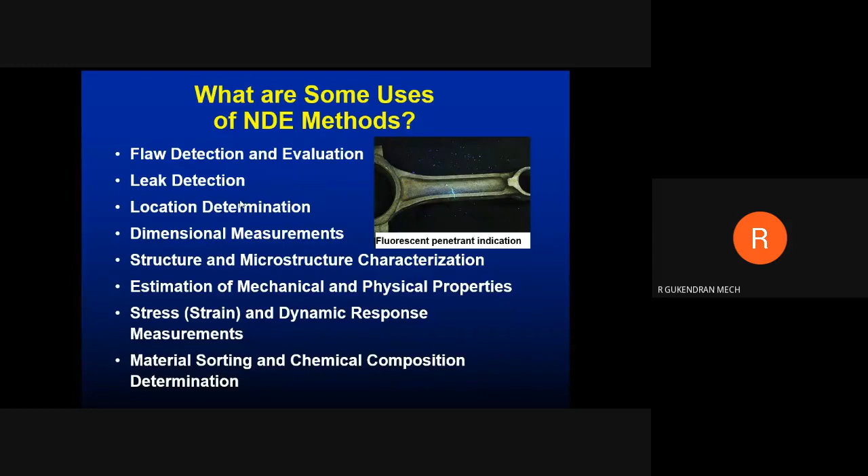Look at this - visual inspection and dye penetrant methods are used only for surface flaws. So coming to this, flaw detection and evaluation, then leak detection - these things may be used.

Leak testing is also available. Magnetic particle testing is not to be used for material characterization - this may be used only for flaw detection.

Eddy current testing and ultrasonic testing may be used for characterization purposes, and also radiography. These things may be used for characterization purposes, and also acoustic emission.

Based on the waves received, you can identify the hardness. Actually I did this with ultrasonic testing to identify the hardness of a steel.

I did experiments with eddy current testing as well as ultrasonic testing. I have used both methods to characterize the material. I have used ultrasonic testing for measurements as well as characterization.

Heat treated components are tested with this ultrasonic as well as eddy current testing, to see how the hardness is varying and how the waves change when the hardness varies. Everything I have studied already - this is for your information.

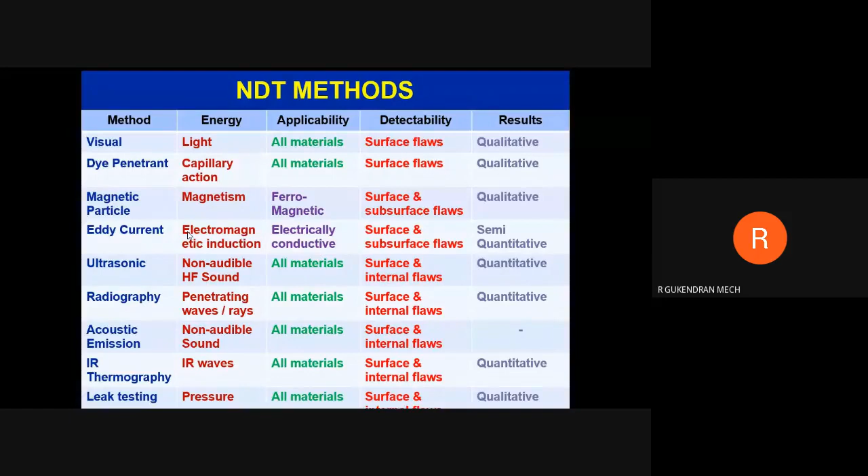And this thermography may also be used for flaw detection.

And when are the NDE methods used - there are applications at almost any stage in the production or life of a component, life cycle of a component. The life cycle is from the design stage to the end of its product life - that is called the product life cycle.

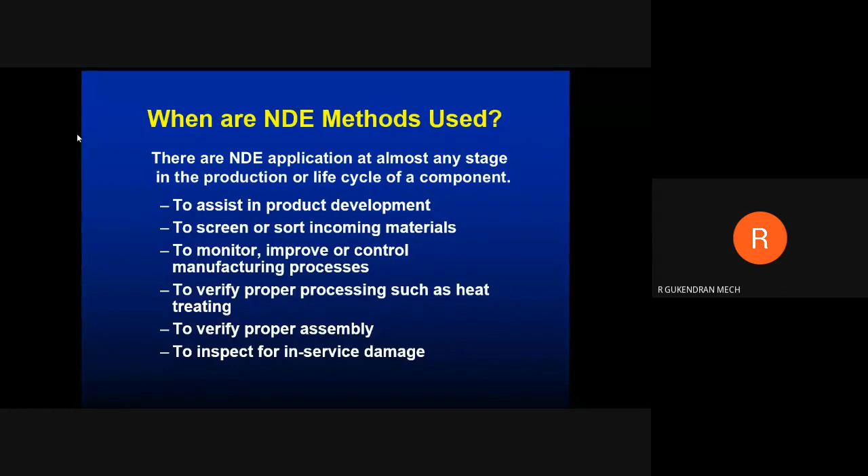This is used to assist in product development, to screen or sort incoming materials, to monitor, improve or control manufacturing processes, to verify proper processing such as heat treating, and to verify proper assembly, to inspect for in-service damage. For these things, we may use these NDT methods.

And the six most common NDT methods: visual inspection, liquid penetrant testing, magnetic particle testing, ultrasonic testing, eddy current testing, and X-ray or radiographic testing. These are the main topics in our syllabus.

Visual and liquid penetrant testing is in the first unit, then this is in the second unit, ultrasonic in the third unit, X-ray is in the fourth unit, eddy current test in the fifth unit, and so on. These are the commonly used NDT methods.

So next we move on to the visual inspection technique. We have discussed what is visual - by viewing with our naked eye or with the aid of optical aids with lighting. Inspecting using these optical aids and with lighting is also called the visual inspection method.

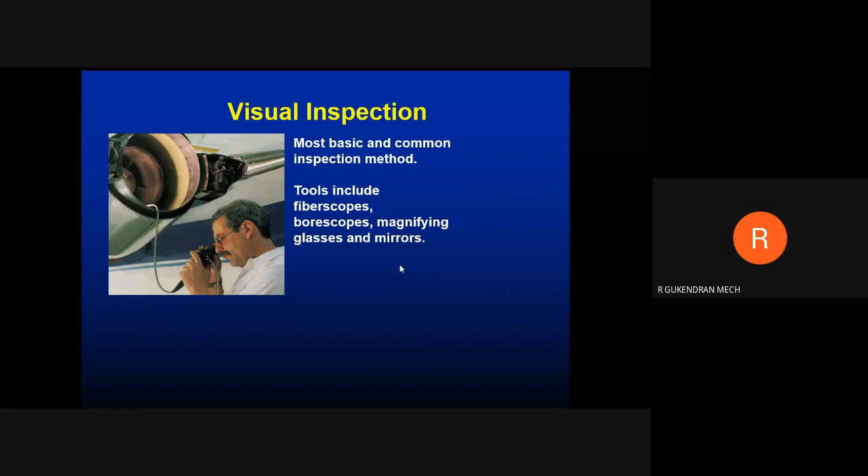Magnifying glasses - that is a microscope or a simple hand glass, handheld glasses, everything. And mirrors - maybe the dentist, they are using the mirror to view the inside parts, right?

Portable video inspection unit with zoom allows inspection of large tanks and vessels, railroad tank cars, and sewer lines. So this will be moved around the railway track or large tanks, right?

Then robotic crawlers permit observation in hazardous or tight areas such as air ducts, reactors, pipelines, etc. In these areas we are unable to access the inside of the pipes, so we can use this kind of robotic crawlers. This will travel inside the pipes so that it will capture a clear image so that we can identify whether any defect is present inside the pipeline or not.

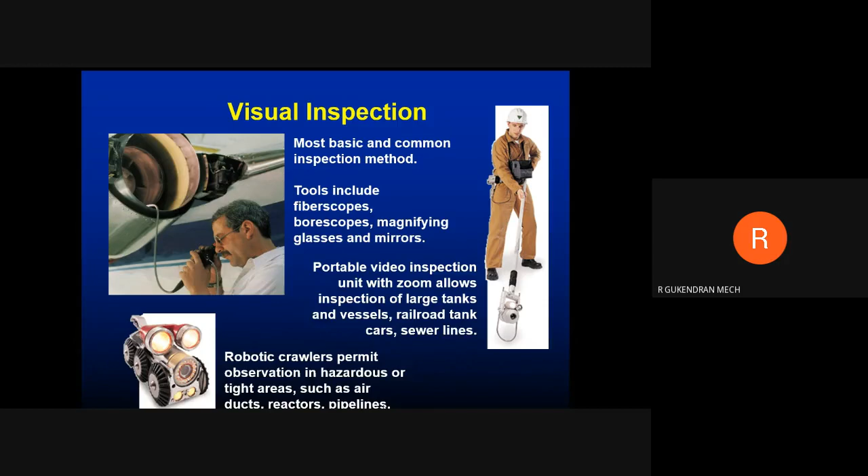Then optical aids used for visual inspection. First one is a microscope, then borescope, endoscope, flexible fiber optic borescope, then telescope and holography. So these are some of the optical aids used for visual inspection.

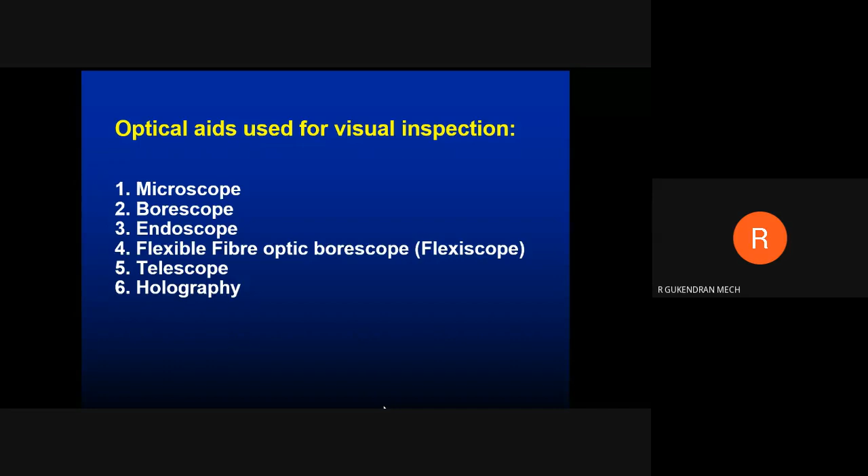Microscope - it is an instrument used to see objects that are too small for the naked eye. The science of investigating small objects using such an instrument is called microscopy. I think everyone has used a microscope in laboratory classes, so I don't think I need to explain much about these things.

And magnification of f - f is the focal length of the lens, and 25 is a constant, the minimum distance at which an object can be seen by the unaided eye.

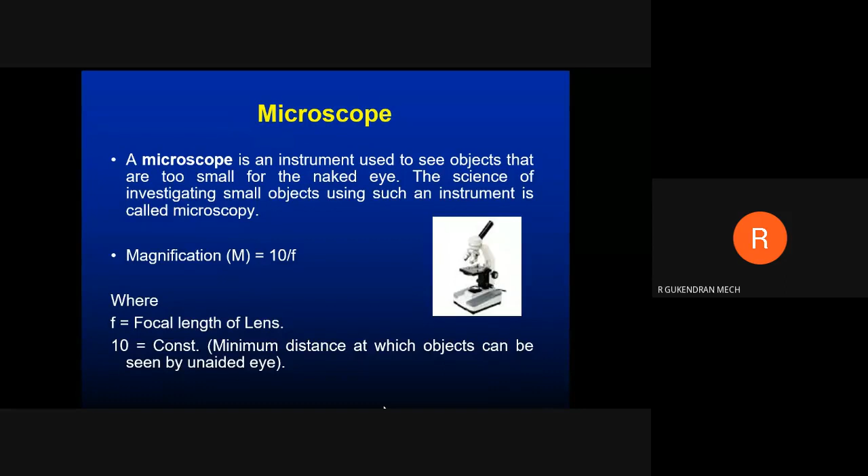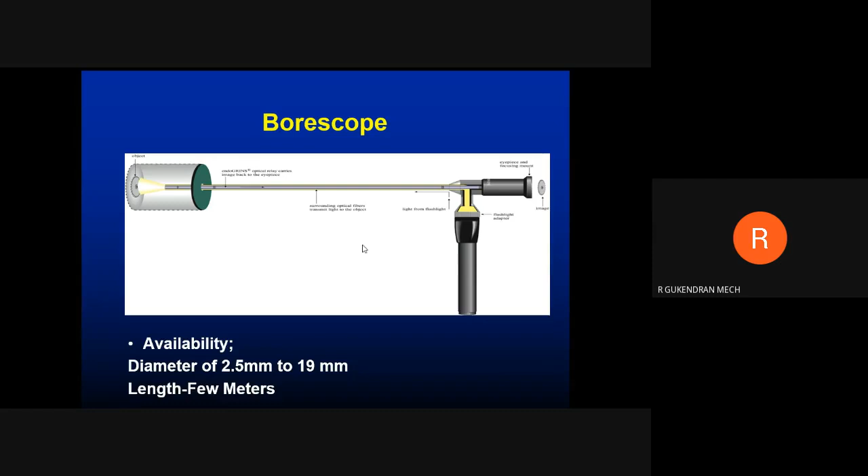This will travel inside small pipes, ducts, whatever may be. Then endoscope - I think some of you may have experience with this, especially no focusing features, diameter less than 1.7 millimeter and length is 100 to 1500 millimeter.

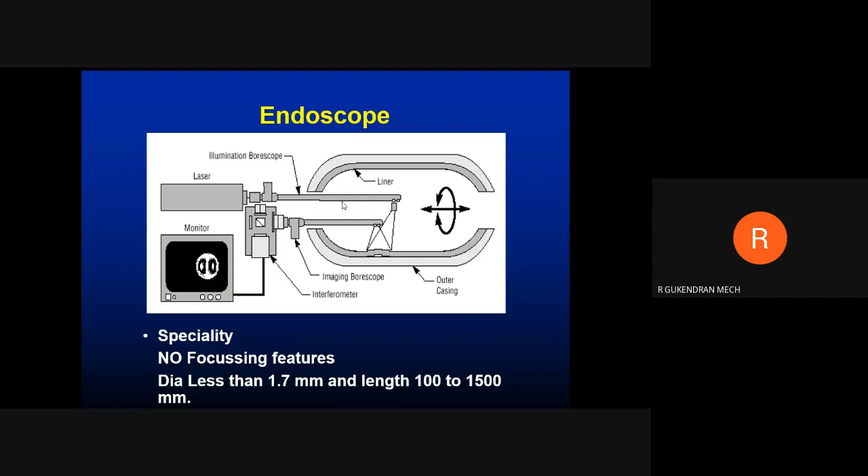The next one is flexible fiber optic borescope, also called flexiscope. This is called flexible so that we can insert this tube in any place, like a wavy place or a small turning duct, whatever may be. One stainless steel sheathing protects the image relay bundle, and working length is 60 to 365 centimeter, diameter of 3 to 12.5 millimeter.

So next one is a telescope. This eye consists of lenses, then CCTV used for this purpose. By using this telescope, we can view the distant object nearby.

The next one is holography - obtaining an accurate three-dimensional image of a given object. First stage is 2D interference pattern and second stage is 3D image by laser.

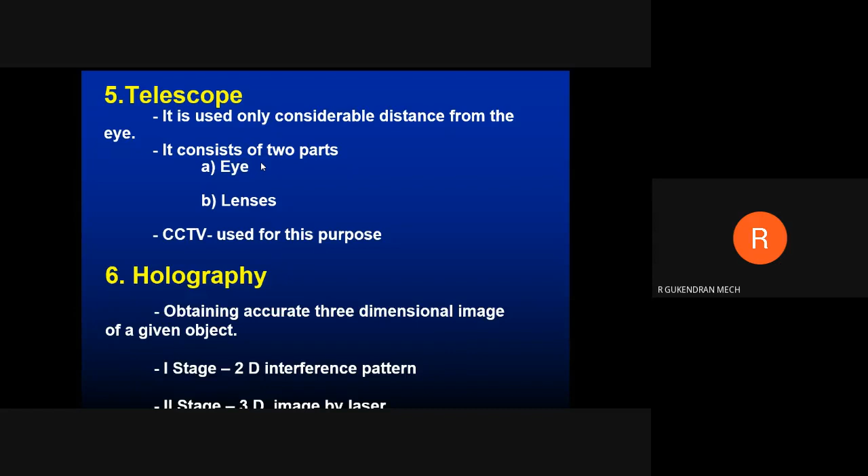Applications: inspection of plant systems, components for any leakage, abnormal operation, etc. Then misalignment of parts in equipment - sometimes the alignment is not proper, that can be identified using visual inspection. Then corrosion, erosion, cracks, fracture may be identified using visual inspection.

Then defects in new or repaired weldments such as gross surface cracks, lack of penetration, tear cracks, excess reinforcements, porosity, mismatch, etc. Then minute discontinuities with the help of optical aids in pumps, compressors, turbo generator parts, instruments, etc. So these are some of the applications of visual inspection methods.

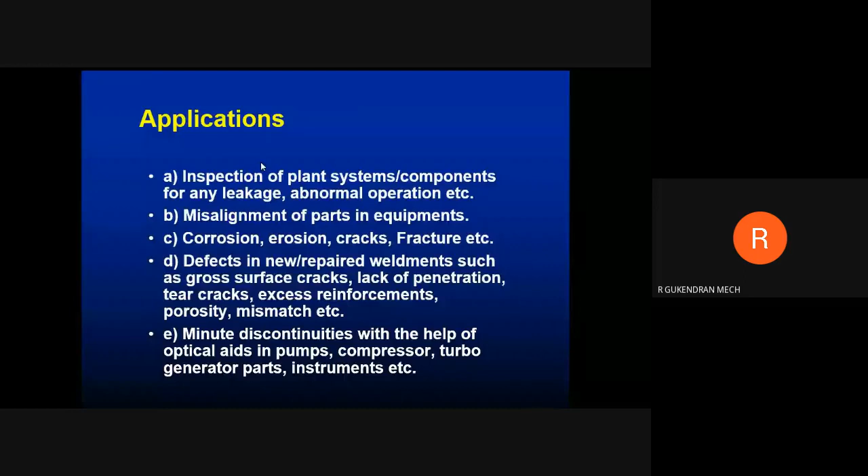That is the use of the visual inspection method. Right. So in this also, very minute cracks present in the surface may not be visible to the naked eye. For that purpose, we may use magnifying glasses. Or if it is not identified, move for another step. That is another method.

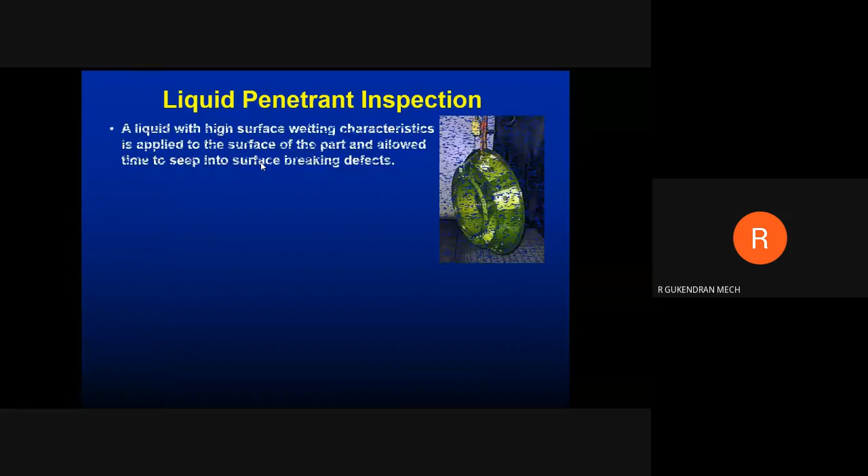So next one is liquid penetrant testing. So before moving to liquid penetrant testing, I'll show you some of the defects present during the manufacturing process. Okay, just a minute. Yeah, just a minute. It is taking too long to open.

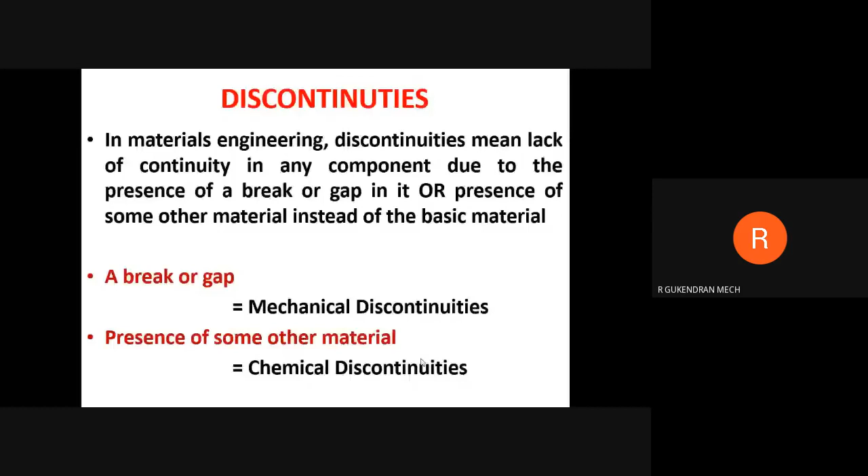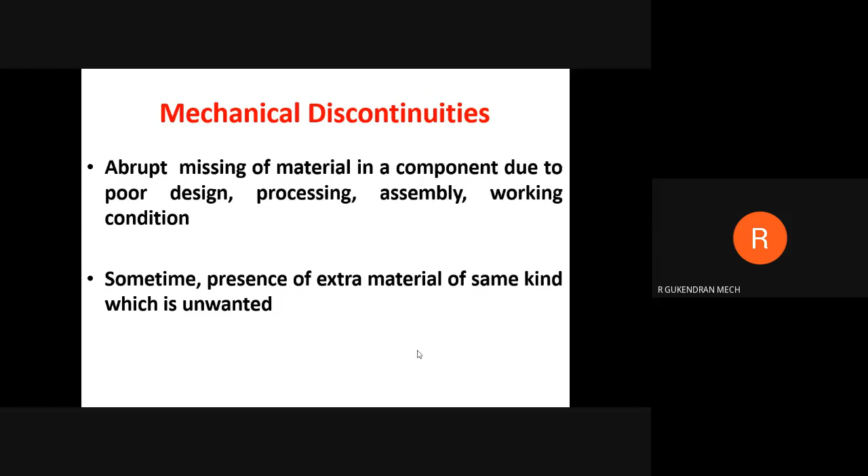Then mechanical discontinuity is abrupt missing of material in a component due to poor design, processing, assembly, and working conditions. So this may be the main reason for mechanical discontinuity, and sometimes presence of extra material of the same kind which is unwanted. That is also called a mechanical discontinuity.

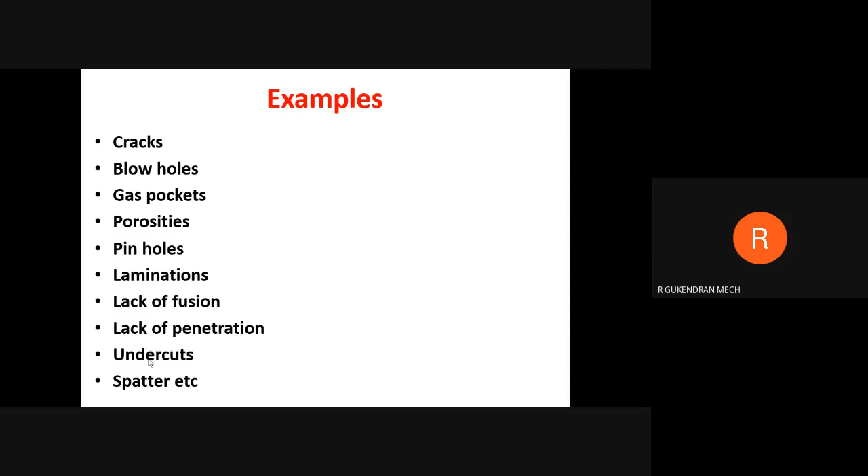Then laminations. This may be due to forging. Then lack of fusion, lack of penetration, due to... then undercuts. This may be available during the welding as well as casting process. Then spatter and so on.

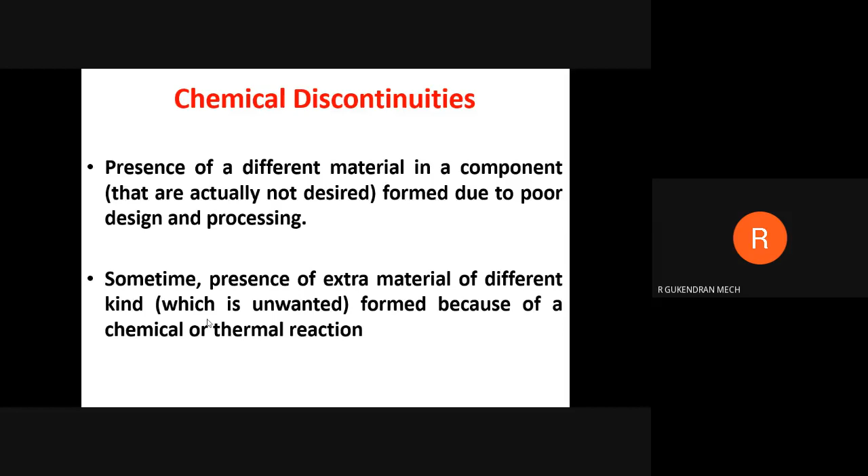Then the chemical discontinuity is the presence of different material in a component that is actually not desired. That is commonly formed due to... sometimes the presence of... formed because of a chemical or thermal reaction. So these are coring, tungsten inclusions, corrosion products, etc.

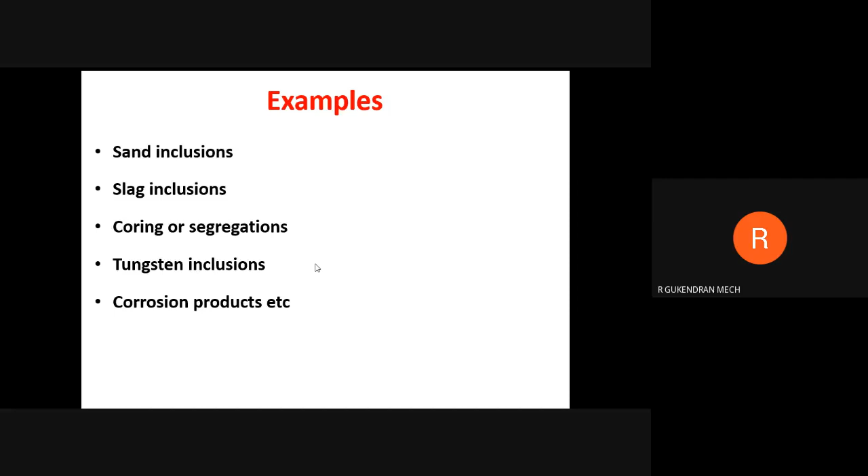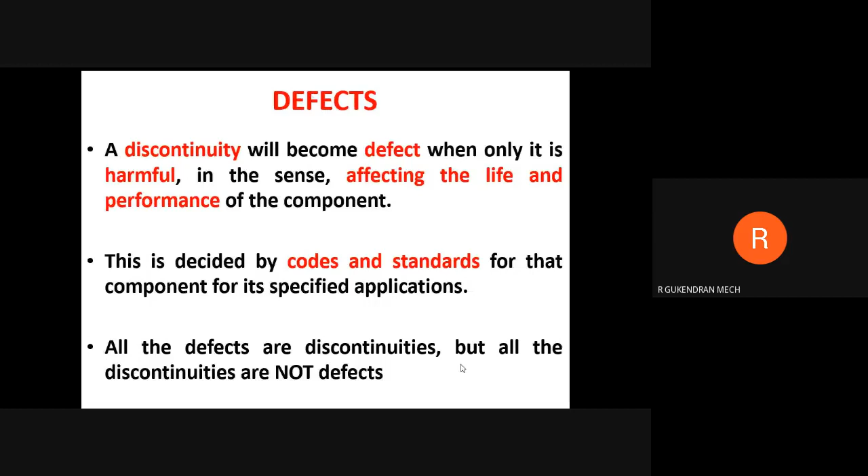And next one is a defect. A discontinuity will become a defect only when it is harmful, in the sense affecting the life and performance of the component, and this is decided by codes and standards for its specified applications. All the defects are discontinuities, but all the discontinuities are not defects. Keep in mind, all the defects are discontinuities, but all the discontinuities are not defects. This may be asked in your competitive examination also.

Then whether it is a discontinuity or a defect, how to identify? So criticality of the component, then the size of the discontinuity, type and shape of the discontinuity, population and distribution of the discontinuities, location of the discontinuity, orientation of the discontinuities. Based on these things, we have to identify whether it is a discontinuity or a defect.

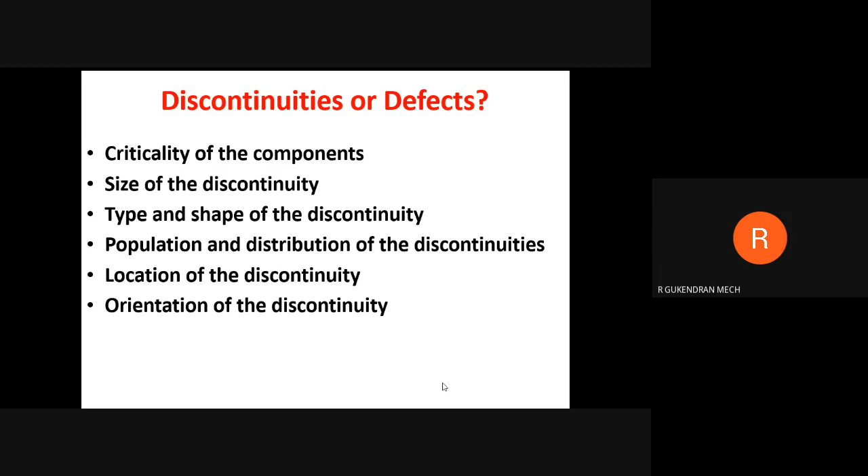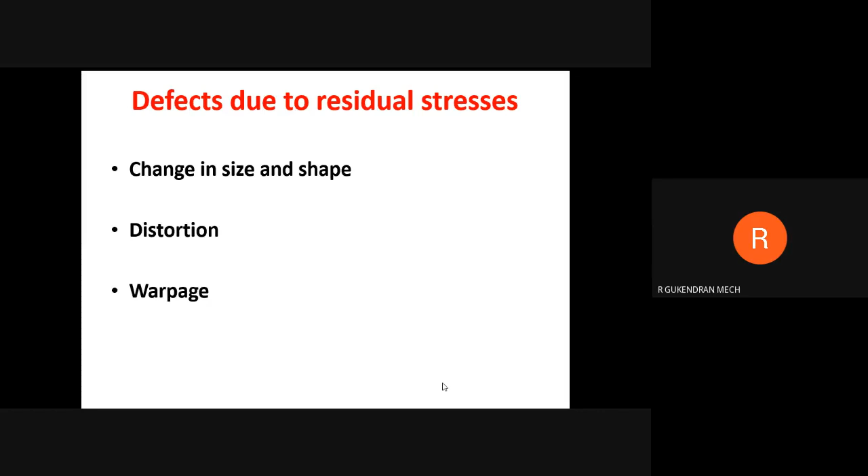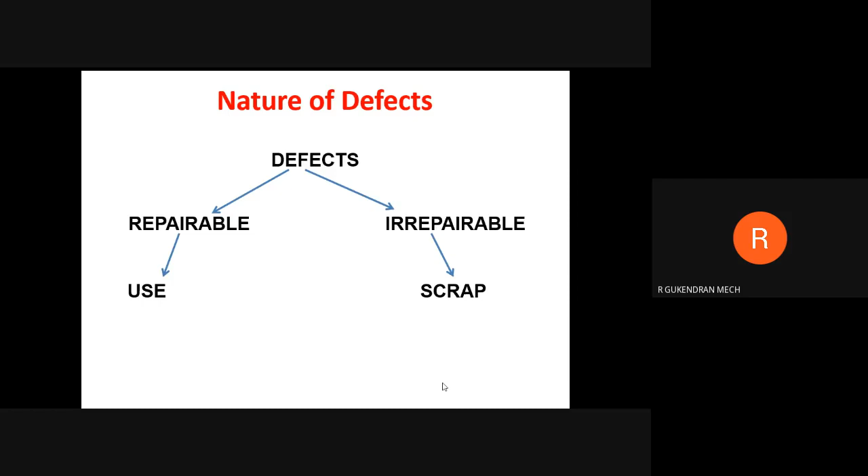Change in size and shape. So maybe a fold or distortion or warpage. These are due to residual stresses. During the machining or forging operation, these things may happen. Right. Then nature of defect. The defects can be classified as repairable and irreparable. Repairable means after repair we can use it. Irreparable, it becomes a scrap.

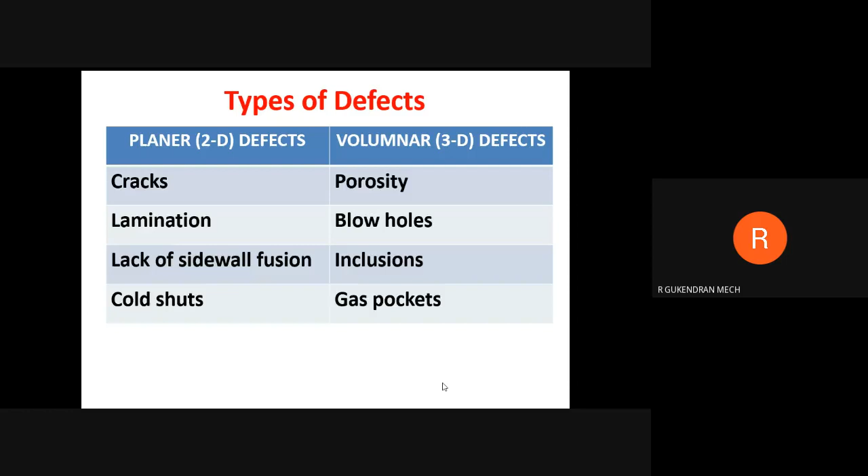The next one is types of defects. So planar defects, that is 2D, and volume defects, that is 3D. Cracks, lamination, lack of sidewall fusion, cold shuts, these are called planar defects, and porosity, blowholes, inclusions, gas pockets, these come under volumetric defects.

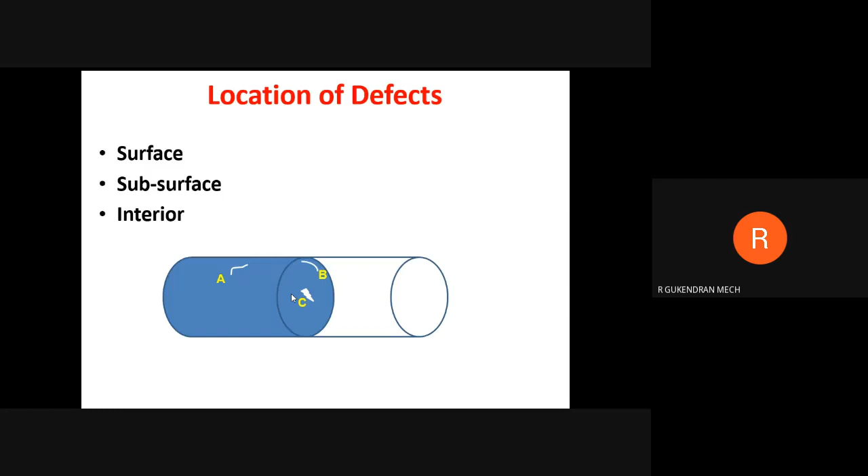Then orientation of defects. Okay, so this one we need to know, because which one is on the surface and which one is subsurface, we must know. Okay, likewise the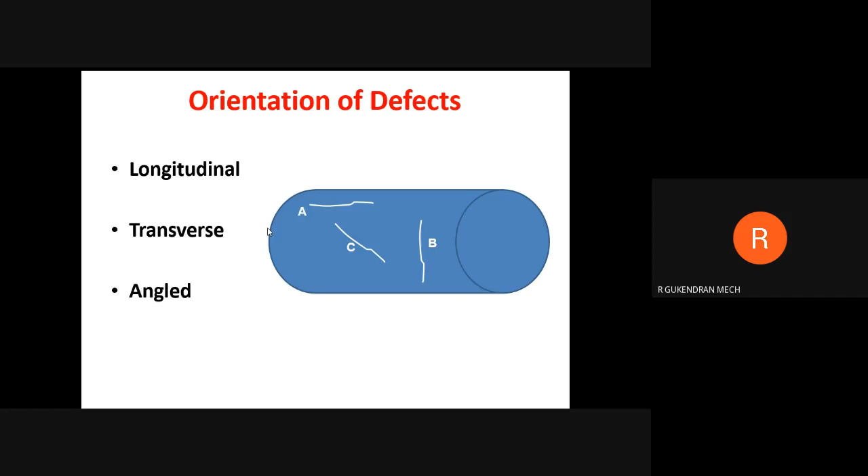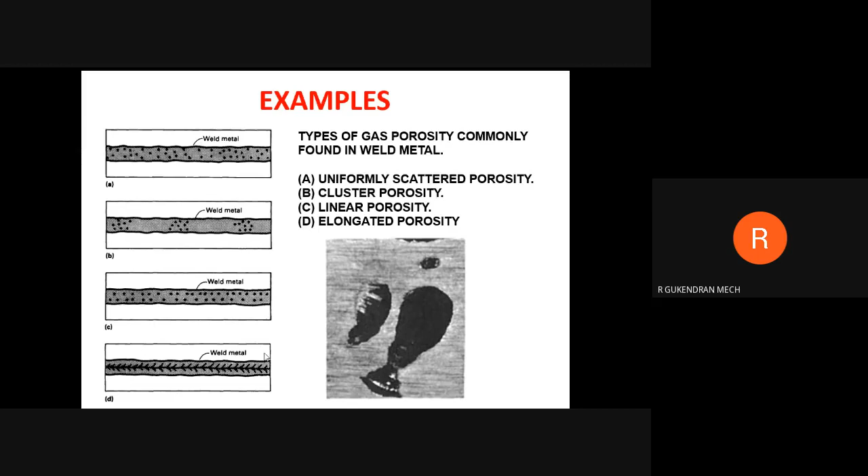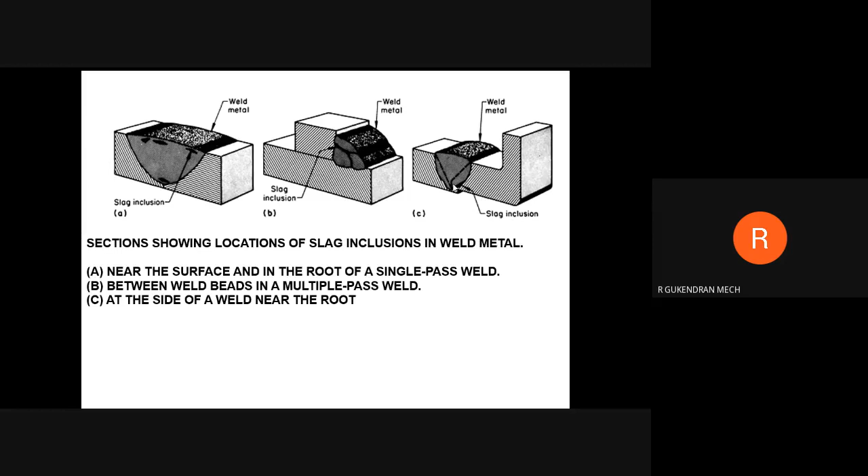And third one, at the side of the weld near the root. So the slag is included in this area, the side of a weld near the root. Root is the bottom side. Here also it shows some slag inclusions. Here it is available, here it is there, here and in this place.